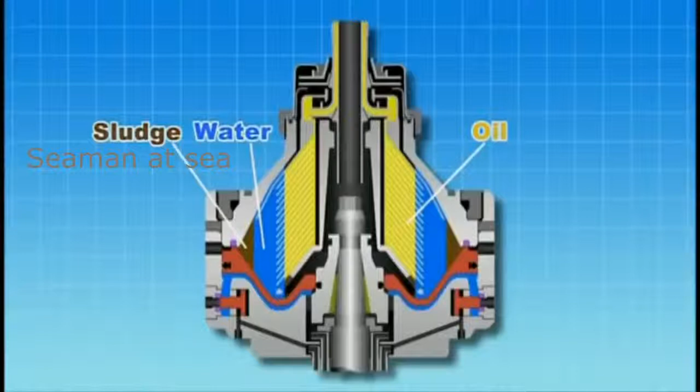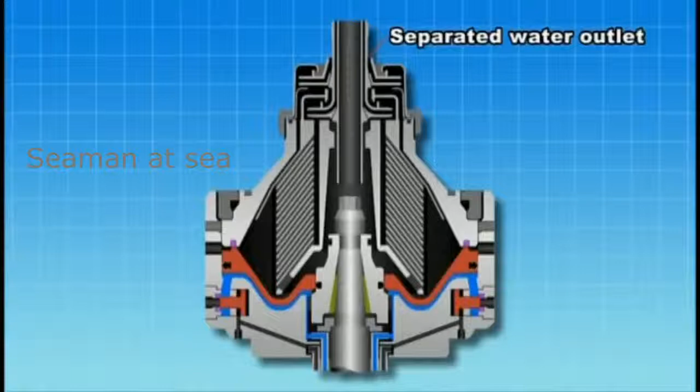Purifier operation involves the three-phase separation of oil, water and sludge. Purifiers have a discharge outlet allowing the continuous discharge of separated water. Prior to passing oil through the purifier, sealing water must be provided to ensure that oil does not flow out to the separated water outlet.

The separation boundary surface must be set in a reasonable range to ensure proper operation. This is achieved by changing the internal diameter of the gravity disc.

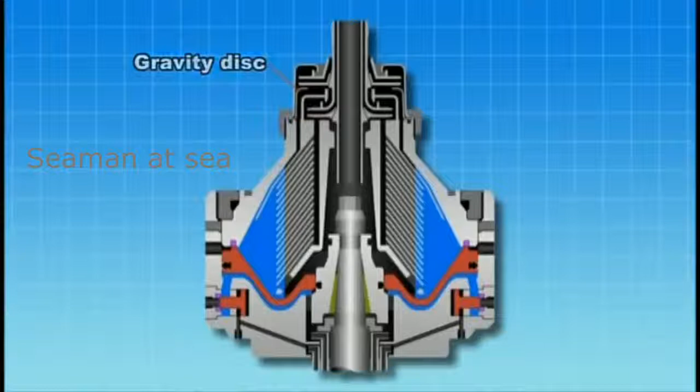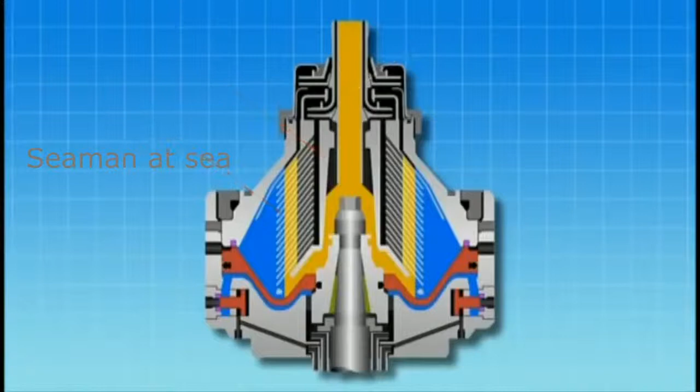Oil enters into the oil inlet and is introduced into the disc via the distributor. The separated water and sludge are forced to the periphery of the bowl. The purified oil moves inside between the discs and is discharged from the light liquid impeller.

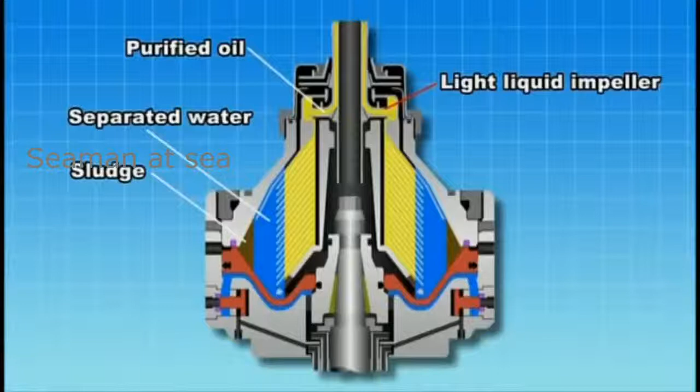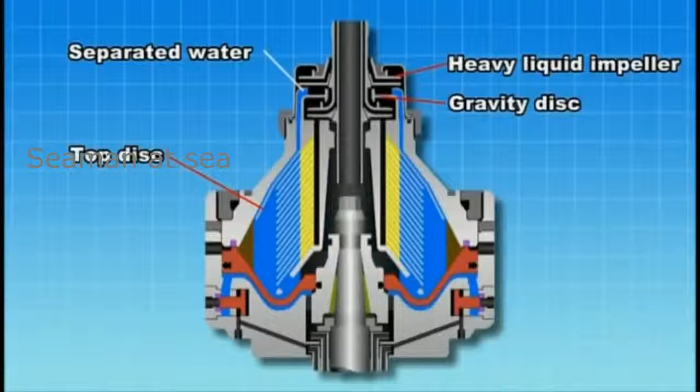The separated water passing outside of the top disc overflows from the gravity disc and is discharged from the heavy liquid impeller. Sludge and separated water are then discharged from the outlet to complete the cycle.

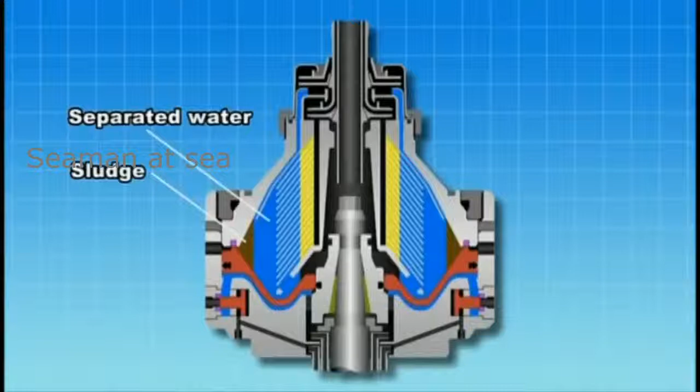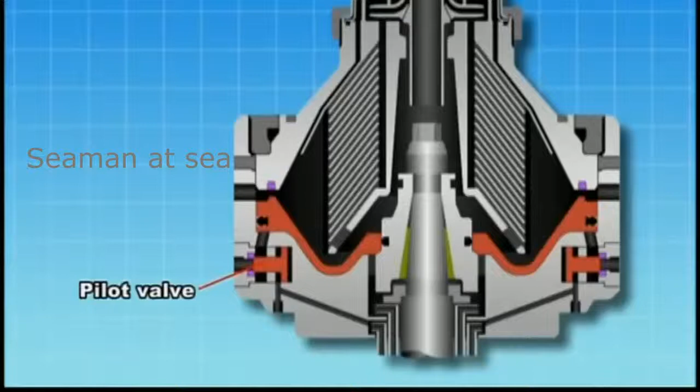Let's have a close look at the purification process. When the bowl reaches the rated speed, the centrifugal force that acts upon the pilot valve seals the valve seat, and the valve closure water pressure chamber becomes filled with valve closure operating water.

The operating water in the valve closure water pressure chamber pushes up the main cylinder using pressure generated by centrifugal force to close the discharge hole.

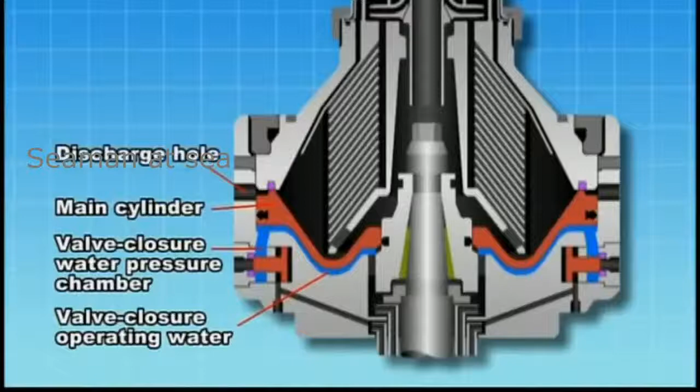Displacement water is supplied from the dirty oil inlet. Valve opening operating water is supplied to fill the valve opening water pressure chamber.

The generated pressure opens the pilot valve seat to discharge the valve closure operating water. At the same time, the main cylinder is pushed down to open the discharge hole and discharge the displacement water.

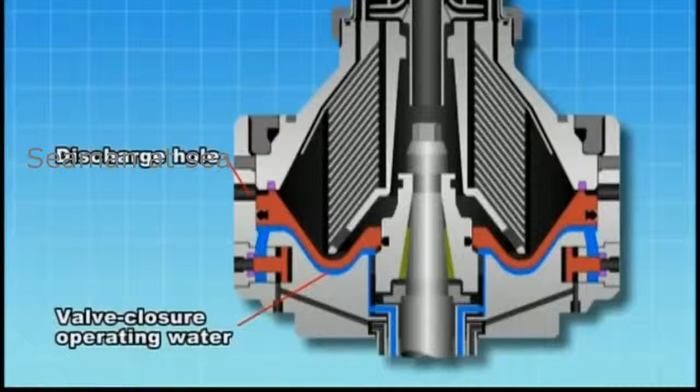Valve closure operating water is supplied again to close the discharge hole. Sealing water is supplied. Fuel oil is supplied. A centrifugal force separates sludge, water and oil.

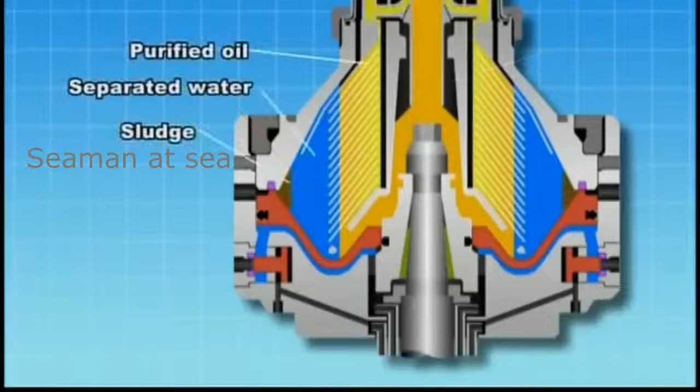Displacement water is supplied. When valve opening operating water is supplied and the valve closure operating water flows out, the force pushing up the main cylinder is dissipated and the main cylinder is pushed down by the fluid pressure inside the bowl.

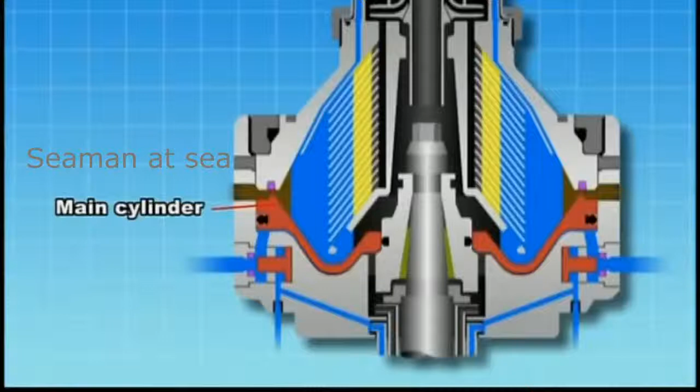This opens the seal of the valve packing, discharging sludge outside the bowl immediately.

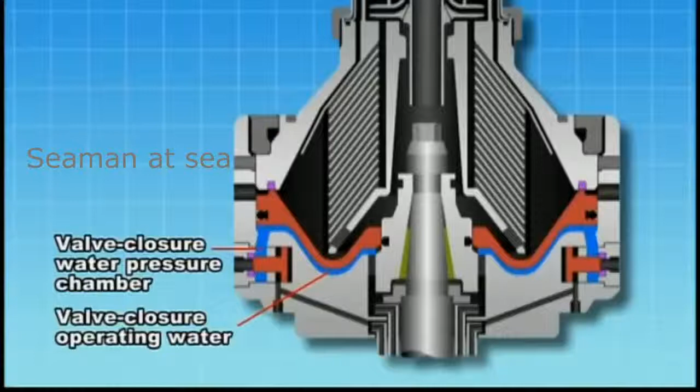When sludge discharge is complete, valve closure operating water is supplied to the valve closure water pressure chamber. As the chamber becomes filled with valve closure operating water, the main cylinder is pushed up to close the valve packing. The purification process starts again, and the cycle is repeated thereafter.

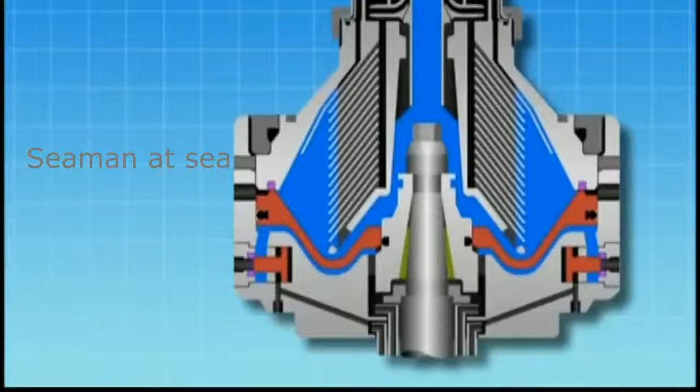The bowl of the purifier turns at high speed to generate considerable centrifugal force. Thus, any mistakes in handling can be very dangerous. Always follow the instruction manual when operating, disassembling, reassembling, as well as maintaining and checking the purifier.